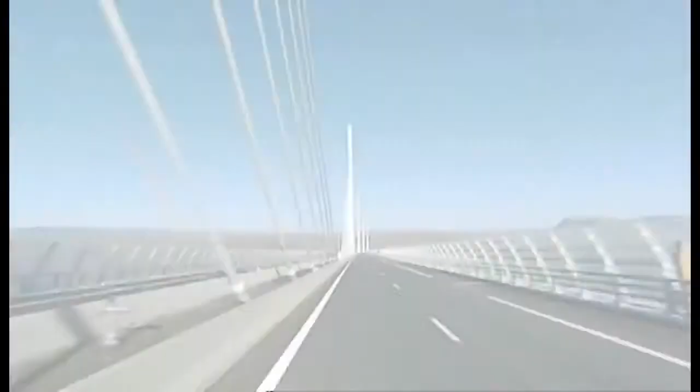This is the Millau Viaduct, the tallest bridge in the world. Its highest tower stretches a staggering 343 meters, so high the bridge glides above the clouds.

But this is a megastructure they said couldn't be built. When I showed first the drawing of this bridge, they really thought I was crazy.

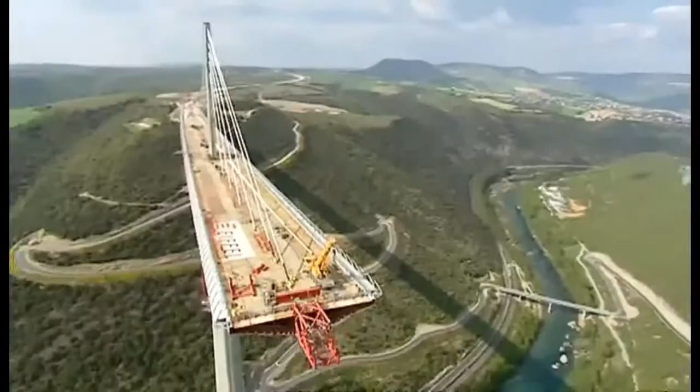The team attempting to build this amazing freeway in the sky had to survive landslides, fight winds gusting at 130 kilometers an hour, and weather massive storms as the bridge simply hung in the balance. It's a bridge that pushes the boundaries of engineering to the limits, and then beyond.

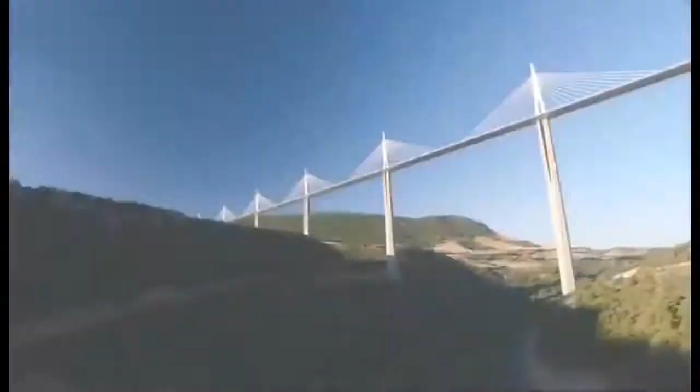Imagine building a series of Eiffel Towers, then slinging a 4-lane highway between them, all the way across one of the deepest valleys in France. Impossible though it sounds, that pretty much describes the building of the Millau Viaduct.

From the start, the construction team faced 3 daunting challenges: build the tallest bridge piers in the world, put a 36,000-ton freeway on top of them, and erect 7 steel pylons, each weighing 700 tons.

And what's more, they had to do this hundreds of meters above solid ground. So high that if you were on top of the Eiffel Tower, you'd still be looking up at this awesome bridge.

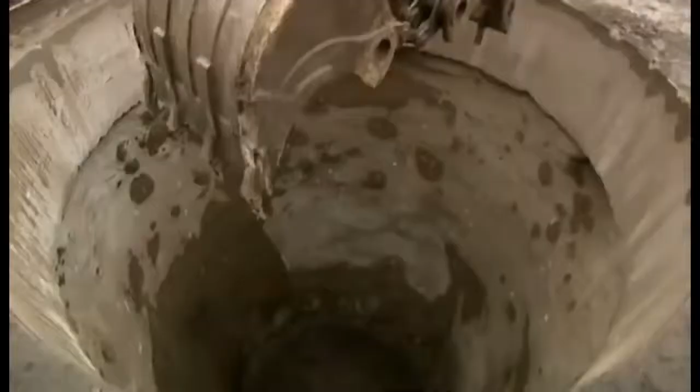October 2001, the team break ground. They're required to build a bridge that'll last for 120 years. And to win the contract, the teams promised to build it in record time, less than 4 years. By comparison, the world's longest suspension bridge, the Akashi Kaikyo in Japan, took a full 10 years to build.

To up the ante, any delay will cost them $30,000 a day in penalties.

There are 7 piers numbered from the northern end of the valley. Number 1 will pose problems because of the steep slope. Number 2 will be the biggest challenge since it's the tallest. Crossing the river, number 3 is not much shorter. Then 4, 5, 6, and 7 climb the gentler slope to the south.

To begin, the team had to bury the foundations deep in the bedrock in order to support the enormous weight the bridge will place on them. But the forces of nature were stacked against them.

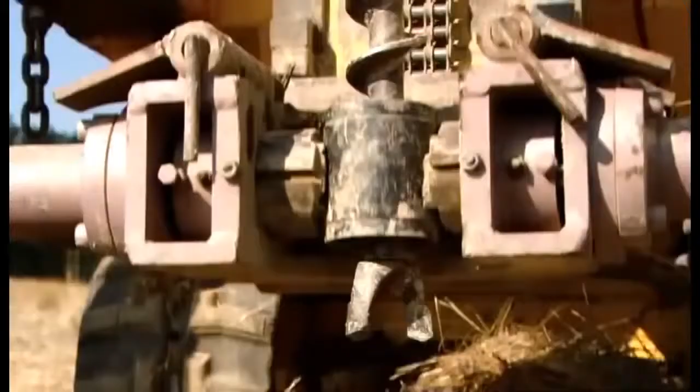Geologists have warned of the risks posed by the region's fractured limestone. The rock is full of cavities that are essential to the local cheese economy. These cave systems, close to Millau, are home to a unique bacteria responsible for the blue mold in the world-famous Roquefort cheese. But what's perfect for cheese could be disastrous for a megastructure.

The geologist's diagnosis spelt one thing: landslides. This kind of catastrophe could jeopardize the entire project. Despite the warnings, building went ahead as planned.

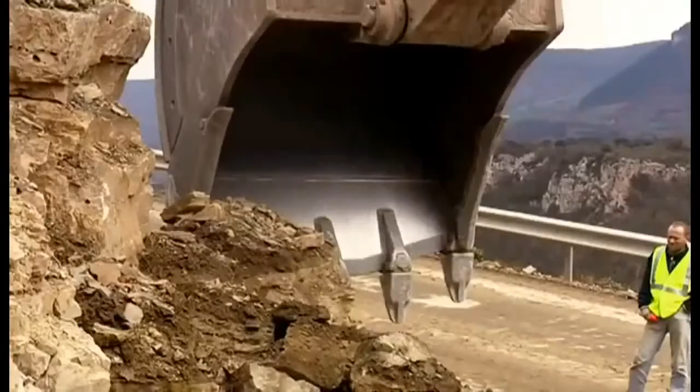Then, well into construction, as predicted, a dramatic storm causes a landslide. 4,000 cubic meters of rock collapse around Pier 1. Fortunately, the fallen rock doesn't damage the pier, but the warning is clear. They're forced to divert precious manpower and equipment to stabilize the slope and prevent a repeat collapse.

So if the area is prone to landslides, why did they build the world's tallest bridge here in the first place? The answer is simple.

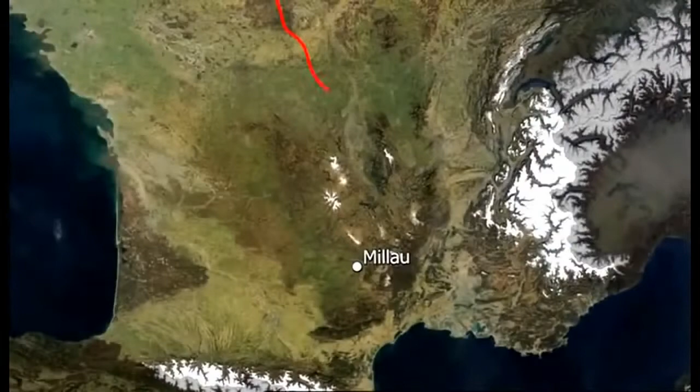In the 1980s, France built a freeway linking Paris directly with Spain. This major artery headed south across the French countryside, while from the Mediterranean, the freeway headed north, until they both hit one of the deepest valleys in France and stopped dead.

Welcome to Millau, France's least favorite bottleneck.

The town of Millau is in the mountainous region of the Massif Central, one of the most tranquil parts of France. But in summer, this poor medieval town suffered traffic hell. The locals couldn't take it anymore. Neither could their mayor.

It was terrible for our reputation. When you hear every day on the television and radio, avoid Millau, there's a traffic backup, a 5-hour wait in Millau.

And it's not just the people of Millau. Two drivers, Jamila and Jemima, crossing the 30-odd kilometers between the freeway on either side of Millau, reveal exactly why this bridge is needed. Jamila, in car 33, will cross the new bridge, while in car 22, Jemima will take the old road across the valley floor.

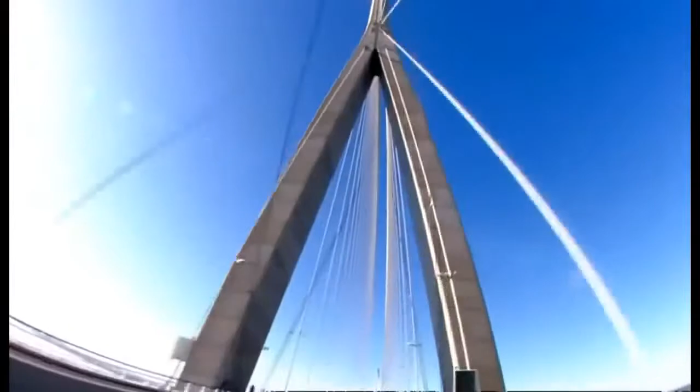With this record-breaking structure completed, Virlogeux was on to his next, Millau. His plan: another cable-stay bridge, but pushing the technology beyond anything previously attempted, with piers 4 times higher than the Normandy Bridge.

The Millau Bridge would not only be the world's tallest, it would be unlike any bridge ever constructed. When I first showed the drawing of this bridge to the relevant authorities, they really thought I was crazy.

Virlogeux's Normandy Bridge has 2 sets of cables supporting the deck. But he wanted to up the stakes for Millau by losing 1 row of cables, so the remaining line would be forced to do twice the work.

More dramatically, the 2.5-kilometer Millau Bridge, instead of having a single main span, needed a whole series of piers to support it across the valley. No bridge builders had ever attempted a multiple-span, single-line cable-stay bridge on this scale before.

The French authorities had a problem. Nervous about Virlogeux's groundbreaking scheme, they held a competition inviting other engineers and architects to compete with different designs.

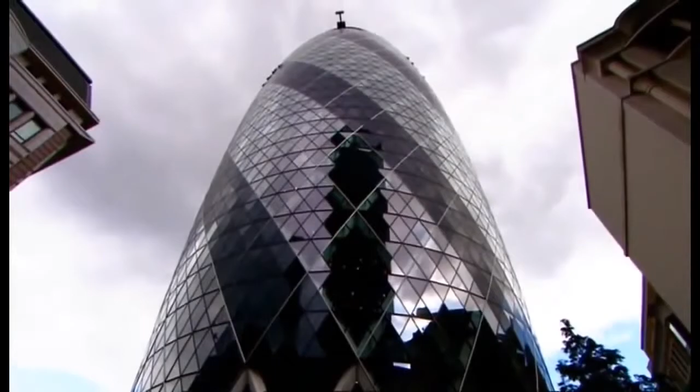The winner, Lord Norman Foster, is one of the world's superstar architects. In Hong Kong, he built the world's largest airport terminal. In Barcelona, offices literally hang from a mast on his communications tower. This is a man who regularly contemplates the impossible and delivers.

You know, it's the challenges, one challenge on top of another, on top of another. And with Millau, one of the biggest challenges was making it fit into the landscape, given it's just down the road from the famous Gorge du Tarn, France's equivalent of the Grand Canyon.

How do you make something which has to be so immensely strong against the forces of nature look very gentle, very delicate? How do you weave something on that scale into the most unbelievable landscape?

Ironically, Foster's answer was to take Virlogeux's pioneering scheme, then push it one stage further. He turned an elegant piece of engineering into a delicate work of art by boldly cutting out 2 of the 9 original piers and seriously slimming down the remaining piers and road deck.

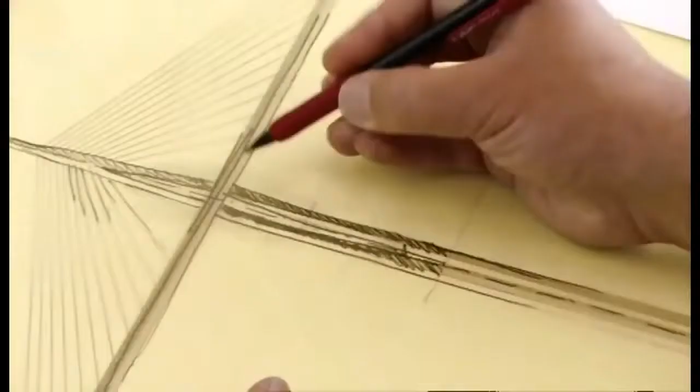Foster wanted the bridge to appear as delicate as a butterfly, but this butterfly has to support the weight of 5 Eiffel Towers in gale-force winds hundreds of meters above the River Tarn. Getting the design wrong would be a disaster.

Then, with Millau still on the drawing board, Foster's record as a bridge builder suffered a major setback. His Millennium Bridge in London is actually another record-breaking structure, the lowest profile suspension bridge in the world. But when this footbridge opened to the public in June 2000, it was a public relations disaster.

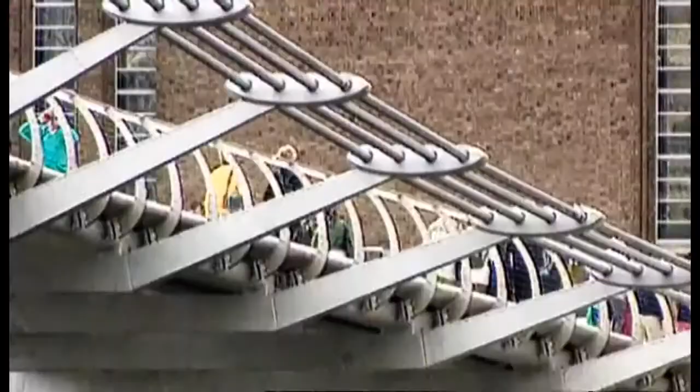Crowds walking over it set up a resonant frequency, and the bridge began to sway. As people adjusted their step to the small initial wobble, the effect was magnified. Though it didn't threaten the structure, the swinging motion became so dramatic the authorities closed the bridge for a refit that took 1.5 years and ended up costing over $8 million.

It was a bad omen for the Millau Bridge, where construction was soon to begin. And at 15 times the height, a design flaw would be a catastrophe.

December 2001, France's Millau Viaduct, the tallest bridge in the world, is under construction. Everything about this project is supersized. It'll need 200,000 tons of concrete, so much that the team have to build a concrete factory on site.

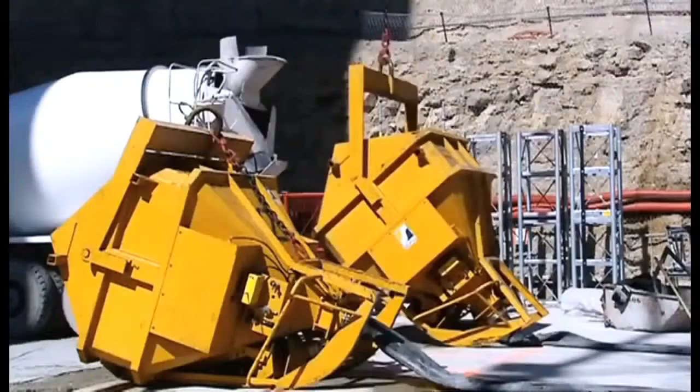But there's nothing straightforward about this concrete. The formula must be just right. It needs structural strength to support the massive loads it'll have to bear.

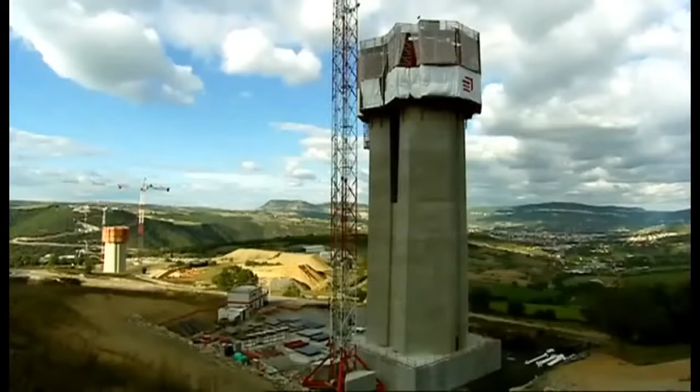But it can't set too quickly, as it has to be hoisted into position and poured hundreds of meters in the air. And it needs to be just the right color to suit Norman Foster's vision. In fact, the architect's vision has created a headache for the construction team. He's designed each pier as a complicated geometric shape, tapering the entire way up with vertical grooves set into them to create shadows. But what's just a line on paper for the architect was a major challenge to build.

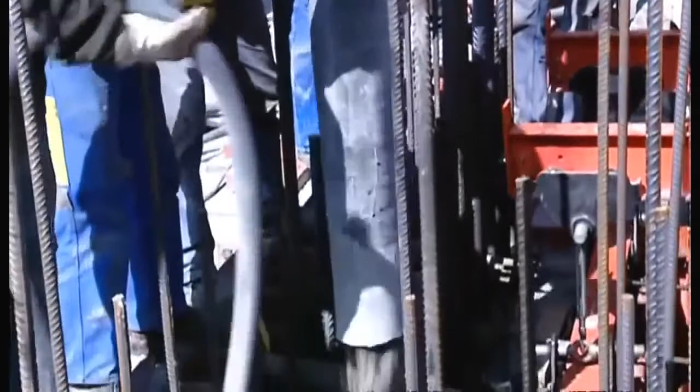The enormous piers are built step by step by pouring concrete into a temporary mold. To give the required strength, the molds are filled with a frame of steel reinforcing bars. In total, 16,000 tons of these steel bars are hoisted into place and secured. Laid end to end, they'd stretch 4,000 kilometers from Millau all the way to Central Africa.

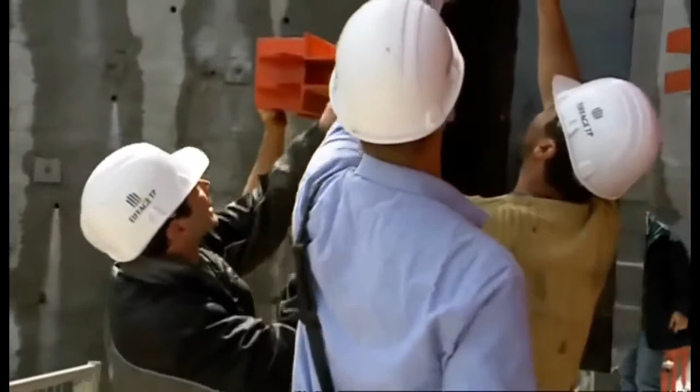The shape of each pier is seriously complicated. As a result, each time they remove the sections of red steel shuttering, they have to change the shape of the mold to fit the profile of the next 4-meter section. Manhandling these steel panels weighing up to 15 tons apiece is no picnic. And with the combined height of the 7 piers totaling well over 1 kilometer, they have to change the shape of the mold over 250 times.

Every 3 days, each team on each pier went through this whole cycle. Then they repeated the process. But it was a race against time, with a permanent threat of delay.

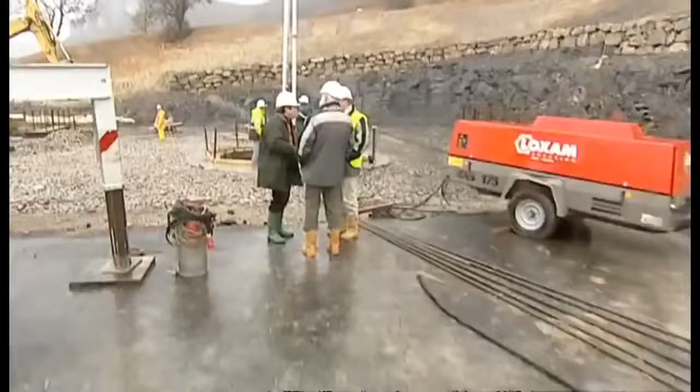Keeping the entire build on time and to budget was the daunting responsibility of one man, Jean-Pierre Martin. If instead of 3 days we took 4, imagine that multiplied by the number of castings. We'd end up with a 3 or 6 month delay. With a penalty of nearly $1 million a month, this isn't something Martin wanted to contemplate.

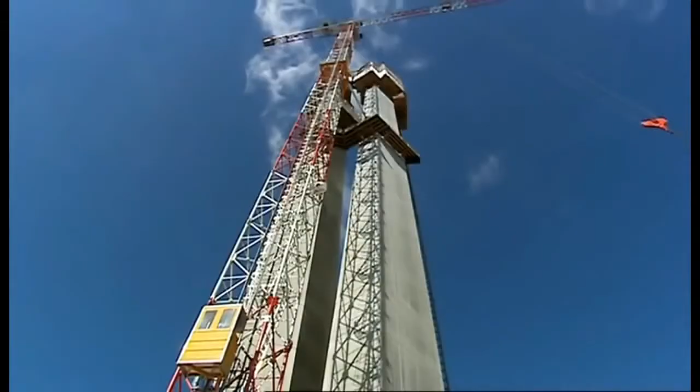And this schedule wasn't his only headache. You have to be pinpoint accurate when you're building the tallest bridge piers in the world. Get it wrong, and the bridge simply won't fit together. Just 10 centimeters out, about a hand's width on each 4-meter section, and the tallest pier could be 6 meters off at the top, the width of a jumbo jet fuselage.

Each team was aiming for a specific point in the sky. For Pier 2, this was exactly 245 meters above the ground, 546 meters from the north side, and 1,914 meters from the southern end. There was no room for error.

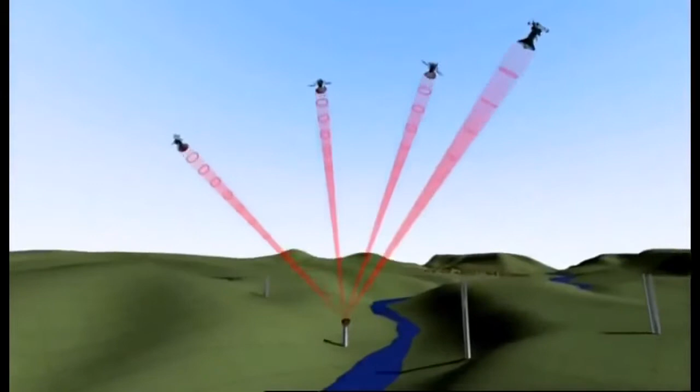The only chance they had to get it right was with GPS, accurate to within 4 millimeters. Using signals from multiple satellites, the team could pinpoint their position and make sure they're on target for that critical point in the sky they needed to hit.

Month after month, the piers climbed higher. Finally, by November 2003, they reached their full height. At 245 meters, Pier 2 becomes the highest bridge pier in the world. But is this record-breaking pillar where it's supposed to be? Amazingly, it's dead on target, to within 2 centimeters.

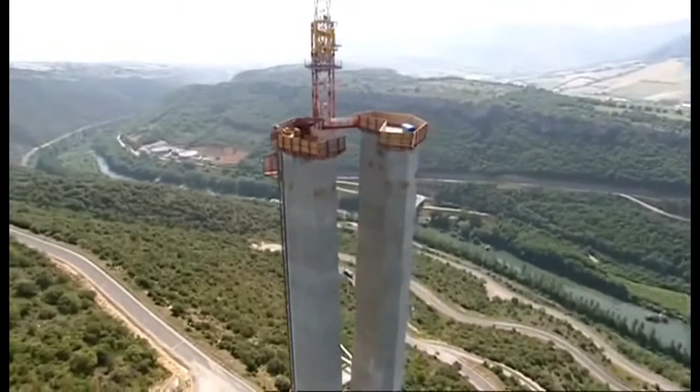Champagne corks pop. It's time for a major celebration. Against all the odds, they were 1 month ahead of schedule, but the team couldn't afford to relax. The next stage of the project would be the most difficult part of the build.

Phase 2 of building the world's tallest bridge involved putting a 2.5-kilometer roadway weighing 36,000 tons on top of the piers, a full 270 meters above the River Tarn.

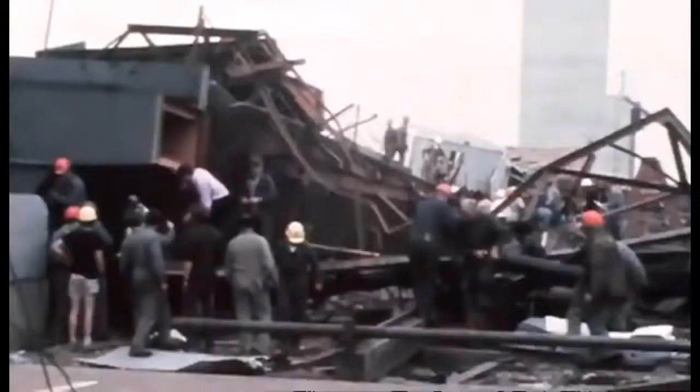Bridge builders know danger comes with the territory, but working at these heights can be lethal. More than 34 died constructing New York's Brooklyn Bridge. 35 died in 1970 on the Westgate Bridge in Melbourne, Australia. And 1 year later, 13 workers were killed when the Koblenz Bridge in Germany collapsed into the Rhine.

With these fatalities in mind, the team decided to fabricate the entire road deck on the safety of solid ground. This meant building it in steel, which in theory would be much safer than lifting vast concrete sections hundreds of meters into position.

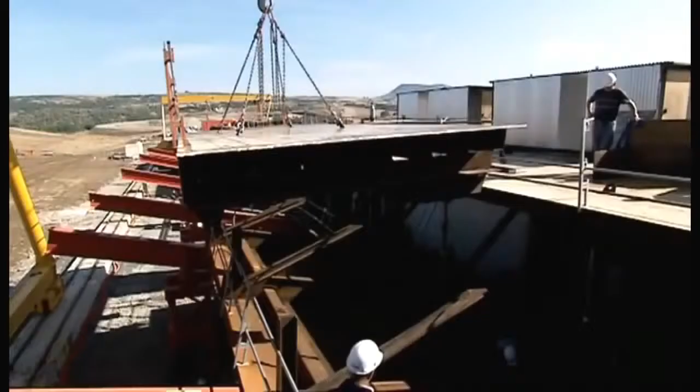There's only one problem with this plan. No one had ever put a road deck on piers anything like this height before, let alone over a 2.5-kilometer span.

In the end, only one steel manufacturer had the courage to take on this colossal challenge: Eiffel, the steel firm set up by the great French engineer. Eiffel built what was once the tallest bridge in the world, the Garabit Viaduct in southern France, before getting round to the framing for New York's Statue of Liberty and, of course, his signature tower in Paris.

But despite the company's experience, Eiffel's director, Marc Buonomo, knew he was taking a serious risk. It was a gamble for the company, because if there had been a mistake, if it hadn't worked, it would have been the whole company.

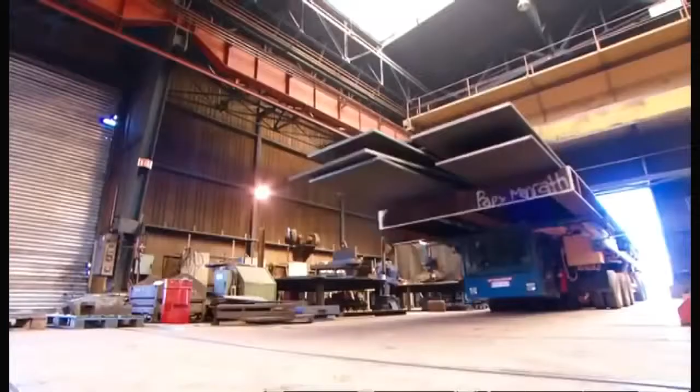They fabricated the massive sections that would make up the road deck in the company's steel factories. This immense jigsaw puzzle involved manufacturing 2,200 separate sections, weighing up to 90 tons and some of them 22 meters long. Their accuracy is measured with a laser to within a fraction of a millimeter.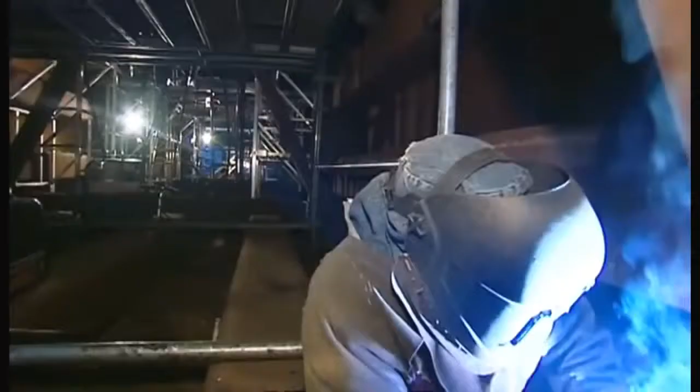The huge square tubes are the central spine that should make the deck rigid. The triangular side panels will be welded on either side to create the width for a 4-lane highway.

To meet the punishing schedule, Buonomo automated the manufacturing with a 2-headed welding robot and a plasma cutting machine. Each cutting pattern or template is programmed into the computer. Then the machine automatically blazes its way through the steel. The torch reaches a scorching 28,000 degrees centigrade, that's 5 times the temperature of the Earth's inner core.

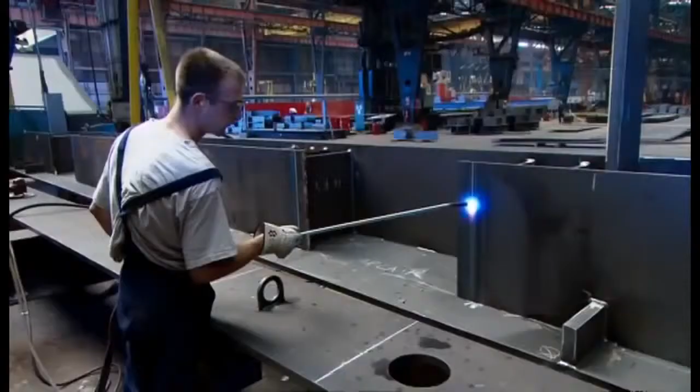But cutting and welding was the easy part. The hard part was getting these monster sections the hundreds of kilometers from the factories to Millau. The routes had to be planned with precision to avoid major damage. The police coordinated safety and clearances.

Even with that level of preparation, some obstacles felt as if they're cutting it just too close for comfort. And this was no one-off event. To build the viaduct took over 2,000 of these extraordinary road convoys.

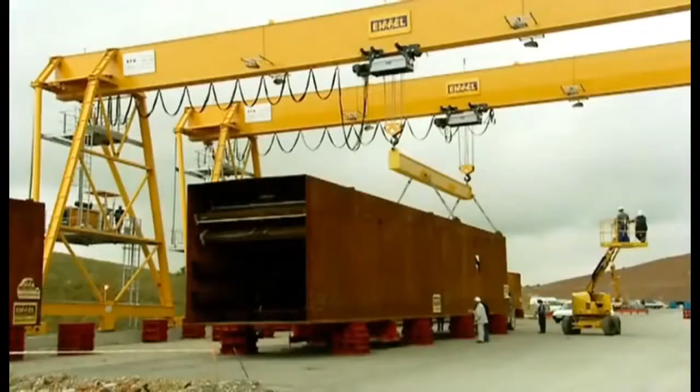The components arrived at assembly plants set up, one on either side of the valley. Here, the pieces of the massive jigsaw puzzle were welded together to form the 2 halves of the deck. But getting these 2 halves to span the valley on top of the world's tallest bridge piers would be a major challenge. They'd be the first team to put a road deck on a pier taller than an 80-story skyscraper.

Pushing bridge building beyond anything attempted before, they planned to slide the entire 2.5-kilometer road deck over in 2 colossal pieces. The bridge's chief engineer, Jean-Marie Cremer, was one of the few people who believed it could be done. All the engineers who know this method, who were in the know, didn't believe it was possible. If the team had got their calculations wrong, the entire structure could collapse into the valley.

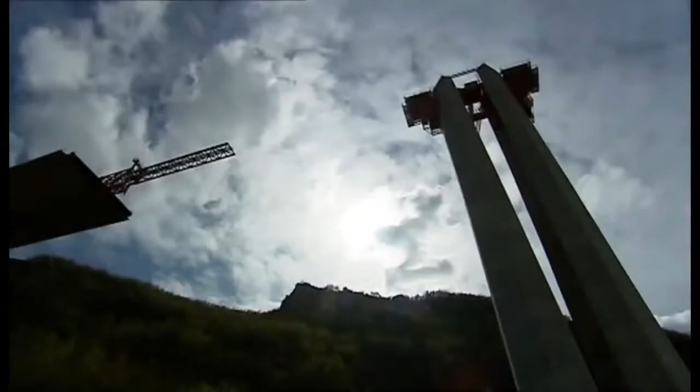We found a solution for the construction, which was to launch the bridge from the 2 sides. One part on the Larzac Plateau, one on the Rouge Plateau. And to push them from the 2 sides and to make them come and meet here above the River Tarn.

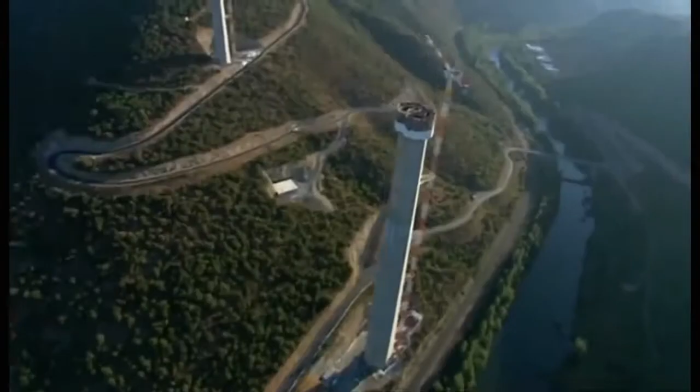Smaller bridges use a similar technique. A powerful set of hydraulic rams literally pumps the deck from one side to the other. But Millau would be the longest launch ever attempted over the highest piers in the world, and the results could spell disaster. The deck is so slender, it would bend and collapse if it were pushed out over the 342-meter spans between each pier. The furthest anyone's previously managed is less than half that distance.

The first part of the solution was simple: fit a pylon so its cables support the front of the deck as it goes out over the valley. Then construct temporary steel support towers that halve the spans to a more manageable 171 meters.

These steel towers were a construction feat in themselves. The largest, over 170 meters high, is the tallest ever built, and they needed to carry a massive load, 7,000 tons, as the leading edge of the deck, together with the first 90-meter pylon, slide over.

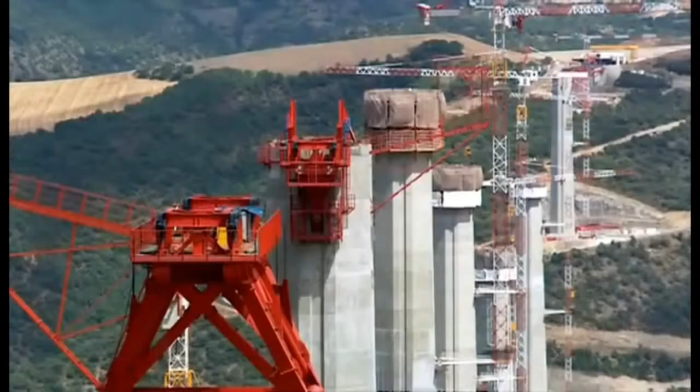And simply pushing this enormous weight over the top of the vulnerable piers would bring them crashing to the ground. This was the nightmare scenario. If we'd done a conventional launch, we would have knocked the piers over like the pins in a bowling alley.

Someone needed to reinvent the way this type of bridge is built. It's Marc Buonomo with Jean-Marie Cremer who came up with the breakthrough.

The basic principle can be demonstrated with a heavy box and a wobbly table. With a normal launch, you push the deck forward and it knocks over the piers, because they're so tall. The idea is to install a launching system on top of the pier, so that pushing the deck has no effect on the stability of the piers, and they won't fall over.

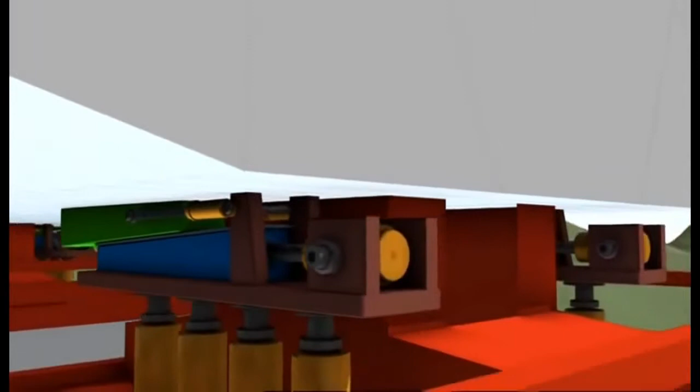The trick is to use a series of these launching systems to jack up the deck and inch it forward. Each system uses two wedge-shaped blocks under each side of the deck. The upper wedge is pulled forward by a hydraulic ram. It slides up the slope of the lower wedge, lifting the deck from its supports and advancing it 600 millimeters. The lower wedge then retracts, dropping the deck onto its supports. The upper wedge returns to its original position, and the whole cycle begins again.

Four of these clever devices are placed on each pier, all programmed to work at exactly the same time. The result is that together, they pick up the entire roadway and shunt it forward. But if one fails or gets out of step, it could spell disaster—the force could push the bridge piers apart till they collapse.

When you're up there and you see Millau 300 meters below you, you ask yourself, was this a good idea?

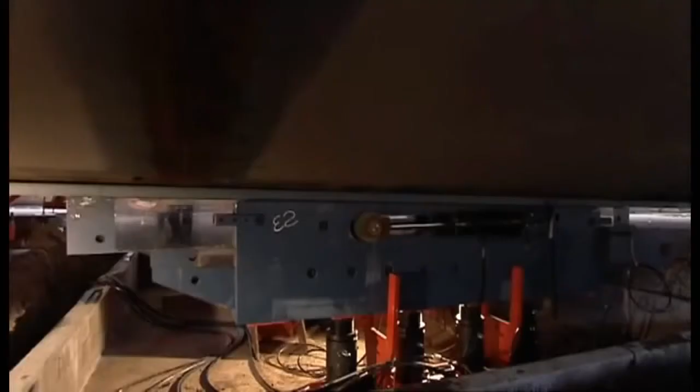The future of the entire project was now hanging on a prototype, and it had never been tested. It's the morning of February 26, 2003—do or die day for the world's tallest bridge. Everything is about to be put to the test: the flexibility of the deck, the strength of the temporary piers, and critically, the pioneering hydraulic ram system.

Even Buonomo, the man in charge of the launch, had his doubts. As it had never been done before, I have to tell you, I had fears that it wouldn't work.

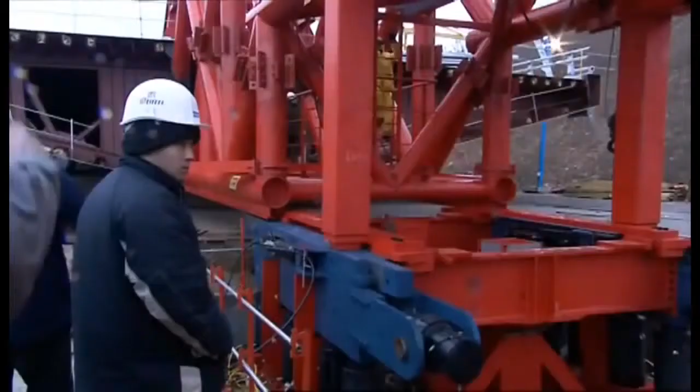The pumps kick in, the pistons start to push, and the deck begins its huge journey across the valley. The moment I heard the motors start, I put my finger on the deck, and I could feel my finger move.

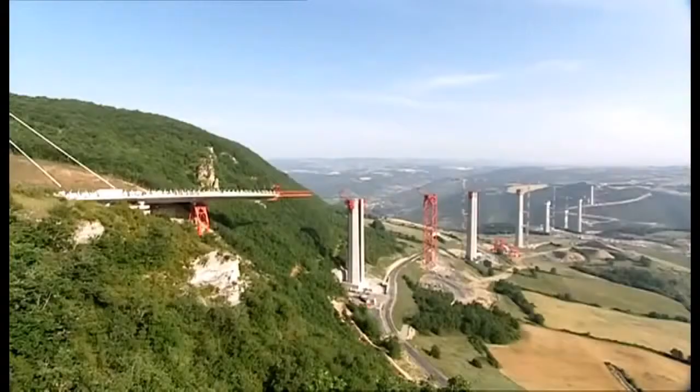Every 4 minutes, the deck advanced 600 millimeters across the valley. Surveyors tracked its progress, but it was still a nail-biting time as they watched the unsupported deck crossing the void. Eventually, the deck reached the safety of the first pier: 204 meters down, only 2,256 to go.

The launching system seemed to be working as planned, and the engineers were feeling optimistic. But as the deck advances into space, it becomes more vulnerable to the wind, which can reach 130 kilometers an hour.

Unfortunately, the road deck has the shape of an upside-down airplane wing, and the team's greatest fear is that this wing could simply take off. The engineers kept a close eye on the wind and weather conditions. When they were satisfied there was a 3-day weather window and the wind wouldn't exceed 85 kilometers an hour, they'd give the construction team the go-ahead, and the deck launch could continue.

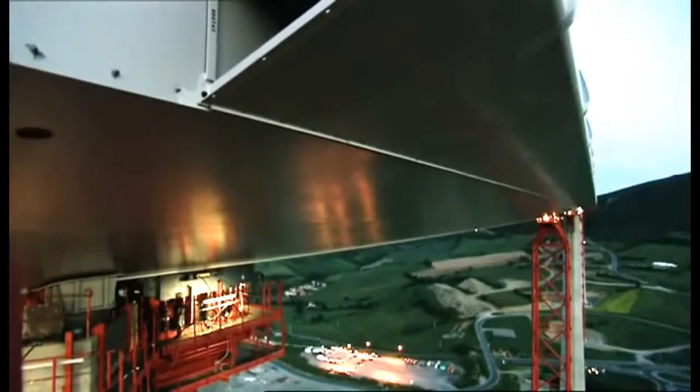The reason for this precaution is simple: strong winds can literally tear a bridge apart. In 1940, Washington State built a suspension bridge across the Tacoma Narrows in the US Northwest. It opened with a grand ceremony on July the 1st, but the celebrations were short-lived. The bridge had a major problem: the wind.

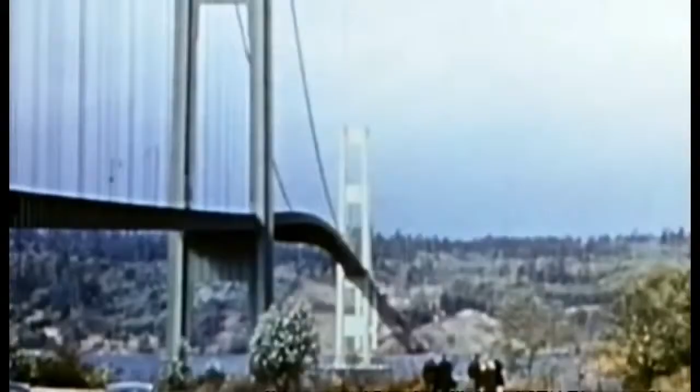Girders beneath the deck, designed to make the bridge rigid, actually blocked the wind, causing the roadway to ripple alarmingly. Locals soon dubbed it Galloping Gertie. On the 7th of November, with the wind less than 70 kilometers an hour, the bridge begins to twist violently. At 11 a.m., time runs out for Galloping Gertie—the wind sends the bridge crashing into the river.

Wind tunnel testing is now standard procedure as a direct result of Galloping Gertie. For the Millau Bridge, they analyzed the wind in the Tarn Valley over 18 months, then recreated those conditions in the wind tunnel. Wind engineer Olivier Flamand was shocked by the results.

The average wind speed was relatively low, but because there's such strong turbulence, it created very fast peak winds. The rugged terrain creates serious turbulence at the height of the road deck. Winds peak at 130 kilometers per hour—that's hurricane force.

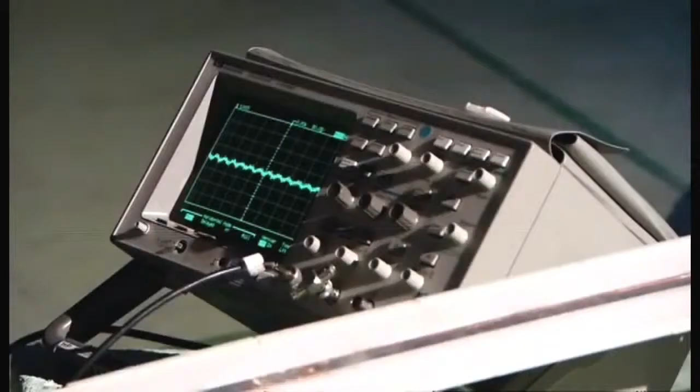They tested every aspect of the bridge to analyze the risks: piers, pylons, and critically the deck. But it's not just the aerodynamics of the finished bridge—they needed to find out how it would behave when it was most at risk, during the launching of the deck.

Olivier and his team reached a chilling conclusion. The winds they've measured are strong enough to blow the unsecured deck off its supports and send it crashing hundreds of feet to the valley floor.

And then the nightmare began. On the 22nd of August 2003, 6 months into the deck launch, one of the launch systems failed, leaving the deck hanging in the wind. To make matters worse, the weathermen were predicting storms.

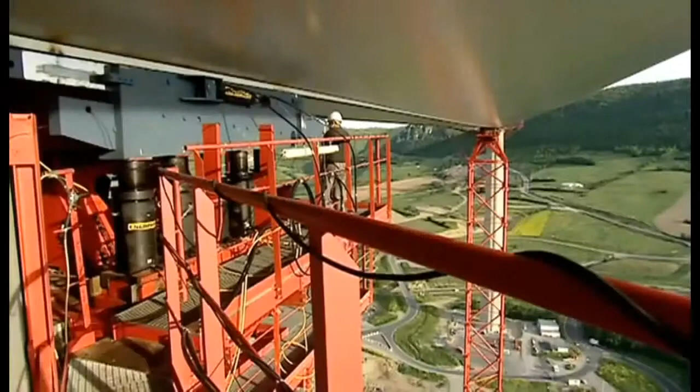So far, these massive pumping machines had worked perfectly. But the fact is they were prototypes, and due to the frantic schedule, they'd never been tested. The problem was that the non-stick Teflon between the sliding surfaces had ripped, and the friction generated was too much for the hydraulic rams to push against.

Unfortunately, no one had planned on replacing parts of this monster machine mid-launch on the top of a massive concrete pillar. This was very bad news for the man who staked his reputation on this system.

It was maximum stress, like poison in your mouth. You don't forget that.

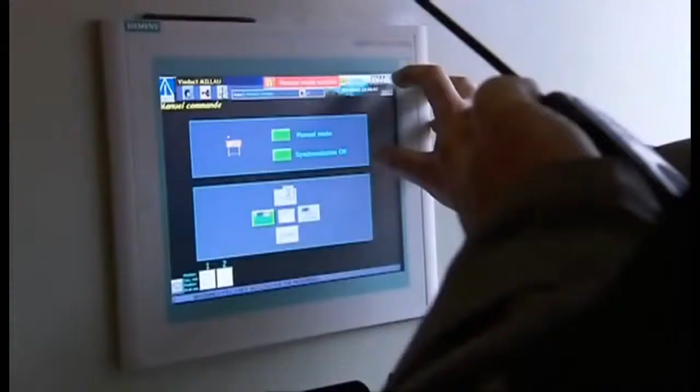Re-examining their calculations, they realized the cause of the problem. They'd underestimated the forces between sliding surfaces, but they wouldn't be able to repair it without the necessary spare parts. The clock was ticking, and Marc Buonomo needed a solution fast.

When Apollo 13 came back with that incident, the NASA engineers requested they do the inventory of everything there was on board to know how to fix it.

The Millau team did an inventory. They realized that the other launching machines, not yet being used, could be stripped to provide the new Teflon surfaces they needed. Working all through the night, the team extended the access platform. This allowed them to take out the 5-meter-long, 2-ton steel wedges, replace the Teflon, and reassemble the launching machine.

By 8 a.m. the next morning, it was ready to resume the launch.

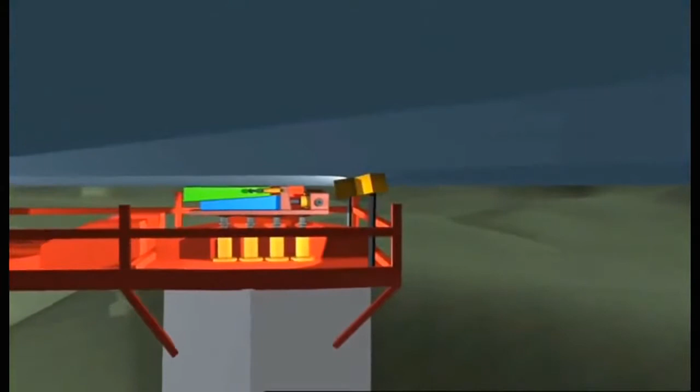The rest of the week, the predicted storms arrived, and another set of launching machines wore out. So when the deck finally made it to the safety of the next pier, the team breathed a major sigh of relief.

You don't forget that. I won't forget that for 4 hours I was really scared.

The two decks continued their journey across the valley. Day after day, week after week for a full 14 months, they approached each other, millimeter by millimeter.

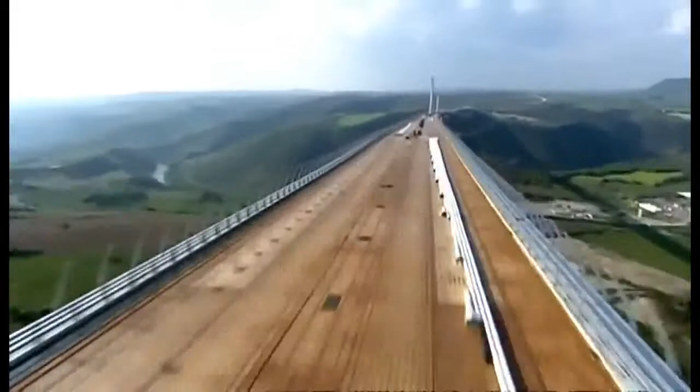By May 2004, they'd reached a critical phase. From the northern end, the shorter deck had traveled 717 meters into space to reach its final resting place. From the south, the longer deck extended over 1.5 kilometers. Only the section over the river, the one point where it was impossible to erect a temporary pier, divided them.

But would they meet as planned? If they've got their calculations wrong, they'll have built the biggest white elephant in Europe.

Even the man behind the whole project had his doubts. I was not convinced at all that the two parts of the deck could meet exactly with a perfect geometry.

The odds were against them. Calculating such a feat so precisely is a Herculean task.

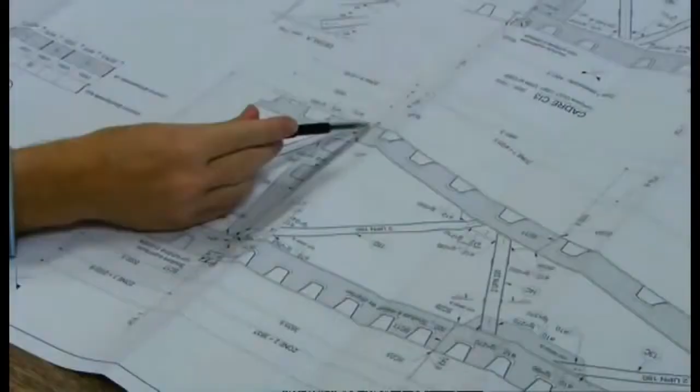Firstly, the two starting points on the northern and southern slopes of the valley are at different heights. Secondly, the bridge has a subtle curve to it. As a result, each steel panel which makes up the road deck had to be cut and welded with extreme precision. It would be an engineering triumph if they got these two sloping curved decks to meet as required.

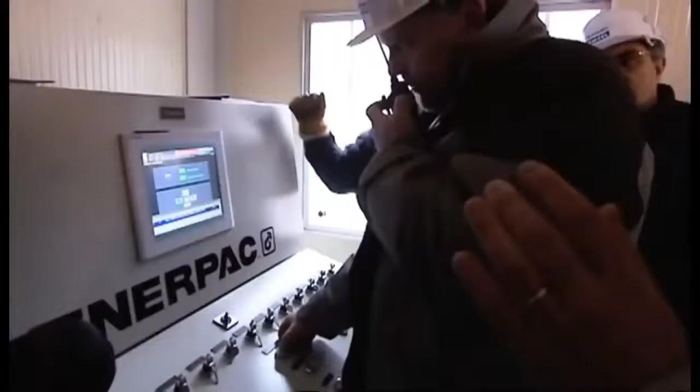The team checked the weather reports. With the wind inside safety limits, they gave the go-ahead for the final push.

The rams began to drive the deck's leading edge off the safety of Pier 3 towards its destination. At this point, a total of 21 launching systems needed to move at exactly the same moment to avoid disaster. If anything were to go wrong now, the man responsible would be Marc Buonomo.

Everyone asked me, how can you be sure that it will go straight? So to be sure that they were going to the right place, I had a GPS put on the front, so I could see the gap between the theoretical and the real position.

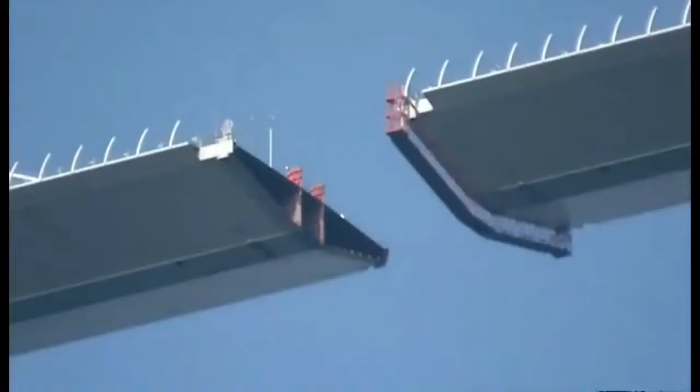Over the next 2 days and nights, the deck advances 600 millimeters at a time towards its final resting place. The world's media are watching the critical meeting of the decks, and to add to the pressure, the French Prime Minister is due to drop in to celebrate the event.

The deck pushes forward, now with only centimeters separating the two sections. A magnum of champagne is hung between them to mark the moment.

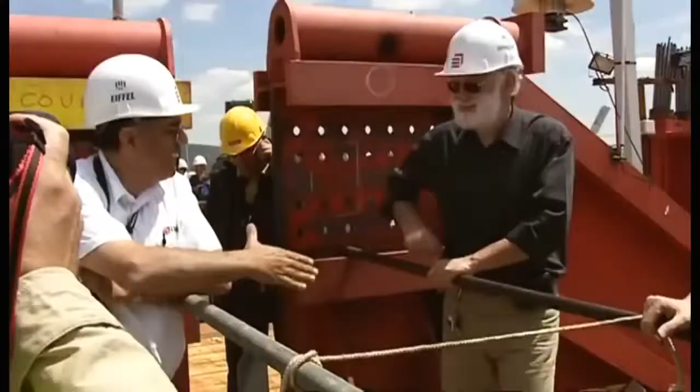At last, union. The two massive steel decks have traveled high over this valley, a total of 2.5 kilometers, and when they check, they're aligned to within 1 centimeter. That's accurate to within 99.9999%. All the measuring, all the calculations have paid off. They've nailed it.

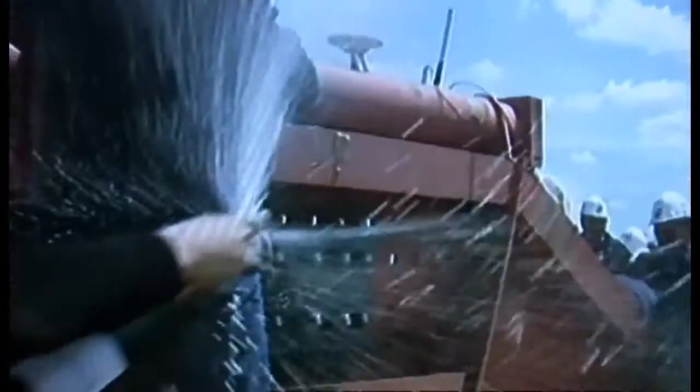The meeting of the decks was a special moment. News reports traveled round the world, and in Salzburg, Austria, they reached Felix Baumgartner, aka Felix the Conqueror. Felix has made a career base jumping from some of the tallest structures on the planet, and within 24 hours, he'd driven to Millau and was calculating the logistics for the jump.

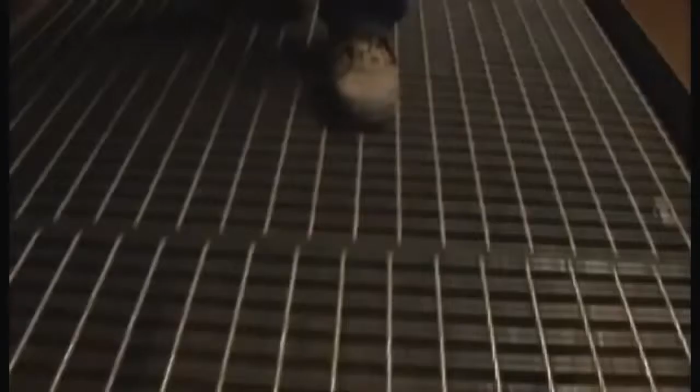Factoring in his two main aims, to avoid arrest and death. Baumgartner waited for darkness before arriving on site. He found his way to the base of Pier 2, then climbed an access ladder the full 245 meters to the top. He entered the steel road deck and found a place to hide until daybreak. He had to remain concealed until the sun was high enough for his cameramen to record his world record attempt.

At 7 a.m. the following morning, Felix the Conqueror emerged. He took a cool backward flip off the tallest bridge in the world and entered the record books. The tallest bridge in the world, 250 meters. I did it. And having evaded death, he made sure he's not caught by the police.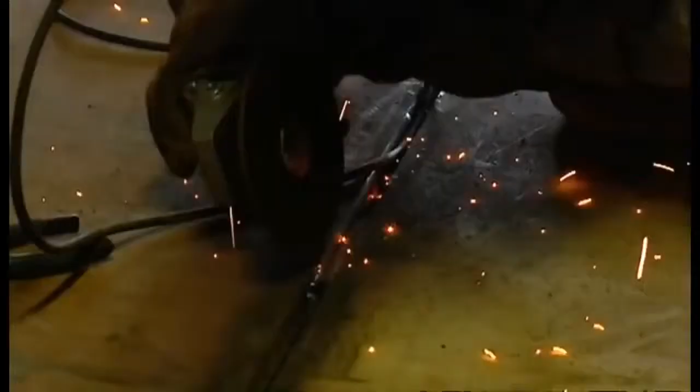The decks have been joined, and the team have reached the final phase of the project. But there was still a race to meet the schedule, and their problems weren't over yet. Everyone could see the dramatic undulations in the flexible steel deck. Even some hardened bridge builders wondered about its structural integrity. It was a huge surprise for everyone. All the engineers said, we knew steel was flexible, but not that flexible.

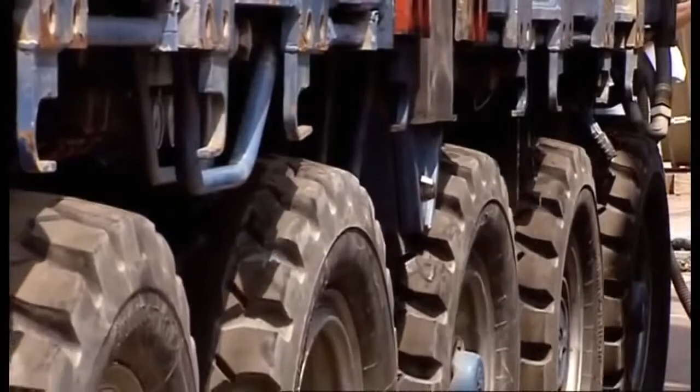The team were relying on the pylons and cables to pull the deck straight. Each massive pylon is 90 meters high and weighs 700 tons, the equivalent of 85 London buses. Placing them in position on the slender deck, high above the valley floor, would go beyond anything ever attempted. Once again, Marc Buonomo had a plan. You know, the first people to make vertical pylons were the Egyptians.

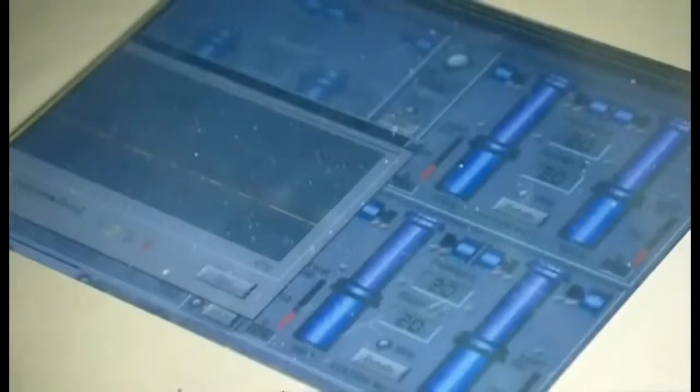Buonomo adapted a technique used in ancient Egypt to erect obelisks in the sands. On top of the road deck, the team put up two enormous steel towers, both of them secured by cables and equipped with a hydraulic system capable of raising 1,000 tons. The 700-ton pylon is then lifted by the hydraulics. As it rises, it pivots little by little until it's vertical. It's then lowered safely onto its anchorage point. Buonomo's 4,000-year-old technique worked to perfection.

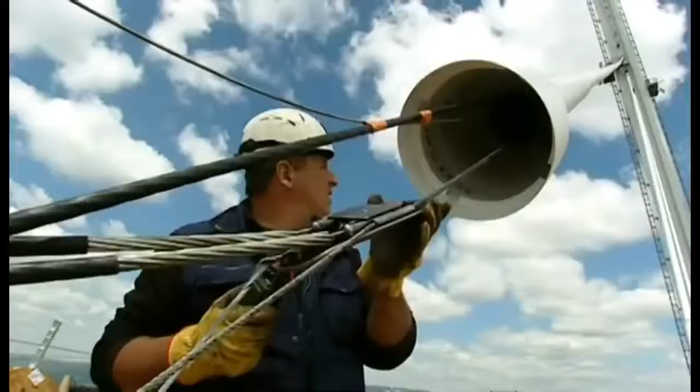With all 7 pylons in place, the team could attach the cable stays that would straighten the rippling deck and give it the strength to cope with full traffic loads, they hoped. The weight of the roadway is now over 40,000 tons, the equivalent of a cruise ship, and the 154 cable stays should prevent it from sagging or collapsing. The strongest stays are made up of 91 individual steel strands and have a breaking strength of 25,000 tons, strong enough to hold back 25 jumbo jets, all at full throttle.

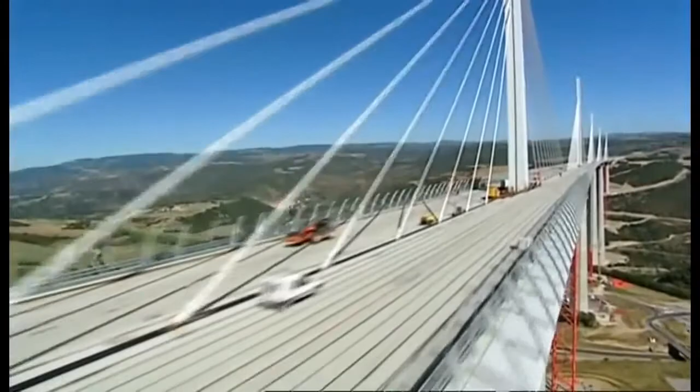As the cable stays are tensioned, true to plan, the ripples in the road deck are pulled straight. Over the 2.5-kilometer deck, the ripples are now no larger than the size of a thumb. They're finally on the home straight. The road surface goes on, adding a further 10,000 tons to the load, that's like driving 153 battle tanks onto the deck. But before it could open to the public, the team needed to know the bridge is safe. It would have to pass one crucial test.

After 3 years, the construction team building France's Millau Viaduct, the world's tallest bridge, are about to find out if they got their calculations right.

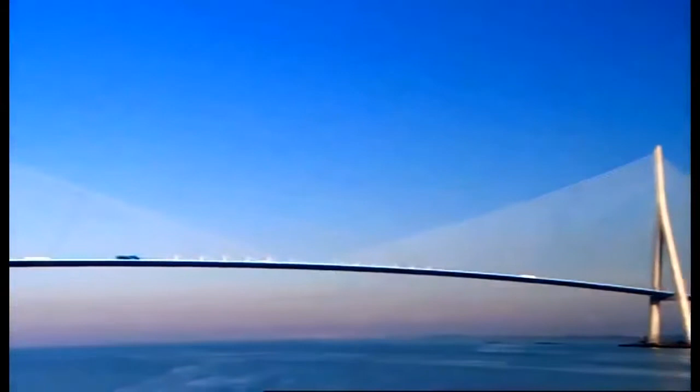On a single-span cable stay bridge like the Normandy Bridge, a large load on the main section is no problem because the cables are attached to solid ground and can't give. On the Millau Viaduct, with its 8 spans, the cables are attached to the deck of the adjacent sections. A load on one section will cause it to drop, pulling the stays down. As the pylons lean in, the matching stays are pulled upwards, lifting the neighboring decks and causing a dangerous rippling effect.

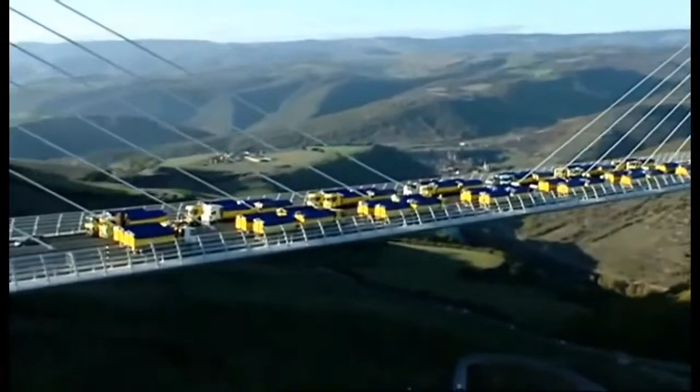It's right now the team put their bridge to the test. These 28 trucks have a combined weight of over 900 tons. They are now positioned in the critical point, mid-span. The engineers hold their breath. Measurements are taken. The span bends just 26 centimeters. This is a triumph for the engineers. The bridge was designed to cope with more than double that.

4 weeks later, on December the 14th, 2004, President Jacques Chirac officially opened the Millau Bridge. A proud moment for the whole of France.

Just over 3 years of construction have produced the tallest bridge in the world, designed to last at least 120 years. And against the odds, the project manager even brought the job in on time. But that's not what he's most proud about.

What I remember, because on construction sites there are often accidents, is that we had no serious accidents, nothing more than a minor injury.

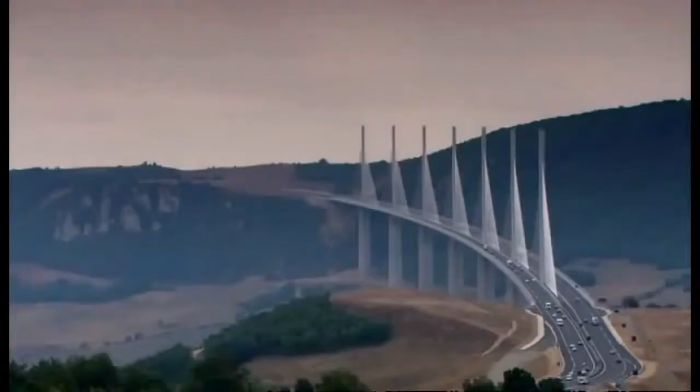As soon as it opened to the public, the bridge was an instant success. But the real test isn't till its first summer, and the French all take their annual vacation. No one ever expected anything like this. Numbers peaked at more than 50,000 vehicles a day. At over $7 per car, that's great news for the construction company, who are clawing back their $478 million investment in the project.

This was an epic bridge to build, but it's just as epic to maintain. Thierry and Frank are assigned to P2, the world's tallest bridge pier. This structure is no solid concrete block. It's a series of vast hollow spaces. Their job today is to test the communication system and electric circuits on each of the 7 structural floors.

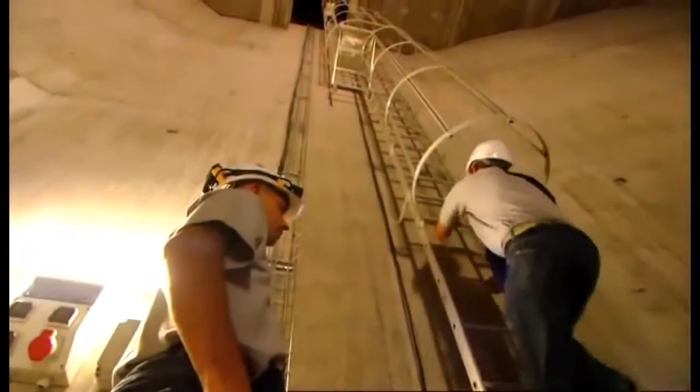This involves a 343-meter climb, going hand over hand up a ladder for the rest of the day. By dusk, when Thierry finally reaches the summit of the pylon, he may be exhausted, but there is a payoff. You get a fantastic view from here, a 360-degree panorama.

The tallest bridge in the world has become an icon. But this is creating problems no one had ever imagined. Locals have been taking over the bridge as a platform to get media attention for their causes. This crowd was hoping that driving sheep over this freeway in the sky would help them get more farming subsidies.

Jose's job is to prevent this kind of incident from creating a danger, and on this bridge, the incidents keep on happening. An alarm triggered by a motion detection system means there's a stopped vehicle on the bridge. Immediately, Jose dispatches a colleague to deal with the situation. The last thing anyone wants is a multi-car pile-up on a 2.5-kilometer bridge, quarter of a kilometer in the sky.

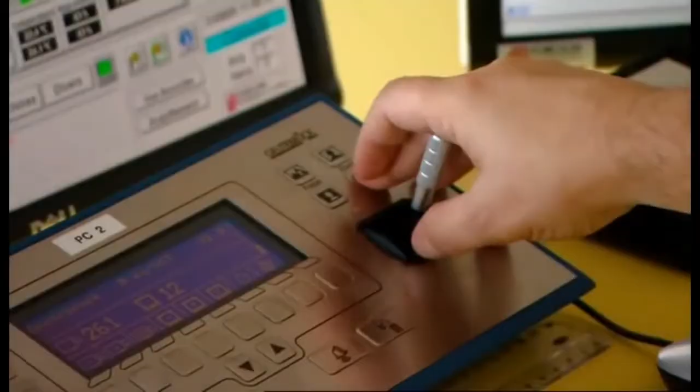Jose zooms in his camera to reveal the man has left his car and is sitting dangerously on the crash barrier. The driver's probably only broken down, but already one man who stopped climbed over the wind barrier and jumped to his death.

Bruno intervenes. Thankfully, it's no more than an irresponsible photographer who's sent on his way.

You could say the Millau Bridge is a victim of its own success. It's definitely become a major tourist destination. 700,000 visitors in the first 9 months. Fortunately, most of them wait till they're off the bridge to take their photos.

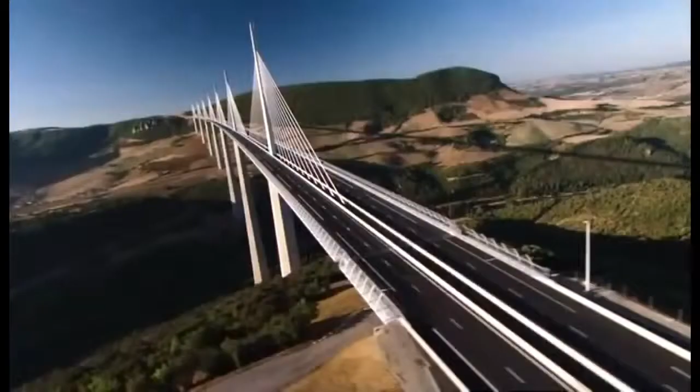It's magnificent. I came 600 kilometers today to see the Millau Viaduct. There's only one thing to say. It's extraordinary. They're drawn because it's a world-beating structure, but also because it's incredibly beautiful, delicate, and minimal. Not what you'd expect from a structure that's nearly a third taller than any other bridge on the planet.

And architect Lord Norman Foster's achieved his aim to give the driver the sensation of soaring. As you leave these plateaus, you do fly. You fly across this bridge. Literally, you are above the clouds.

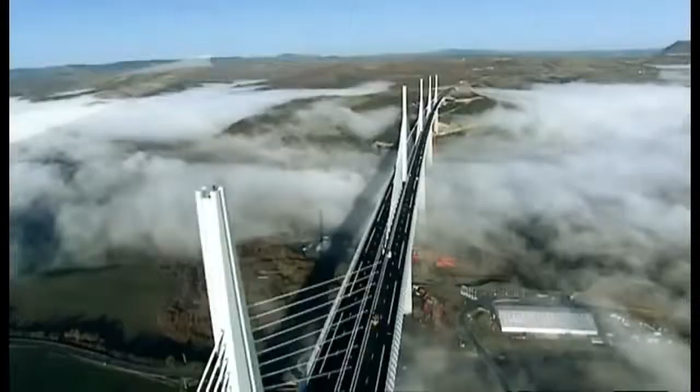And the result certainly pleases the man who dreamt it all up. To see erected this bridge, which I imagined 15 years ago, it's something magic.

This is the longest pure cable stay bridge in the world, the tallest roadway in the world, and of course at 343 meters, it is the tallest bridge ever constructed.